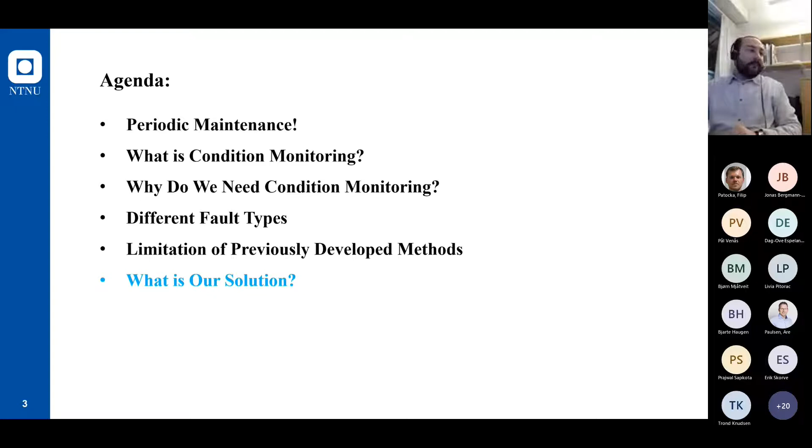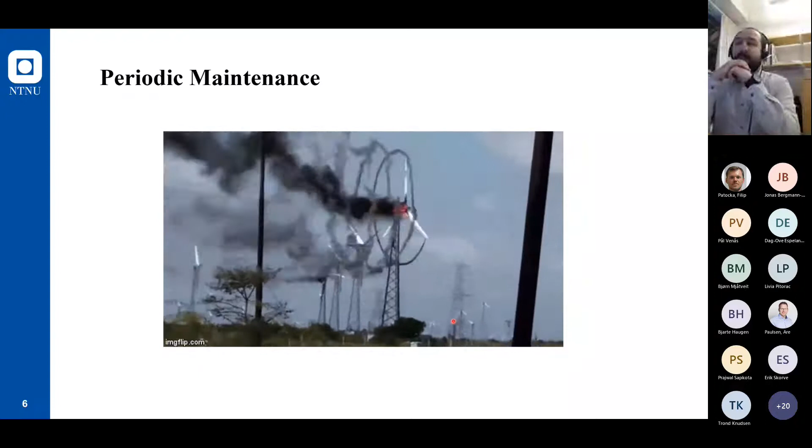As you all know, electrical machines are working based on Maxwell equations, but they are not smart enough, intelligent enough to tell us when they will fail, or when is their periodic maintenance time. So if there is any type of failure in an electric machine, they will not give us a notice before, they will fail.

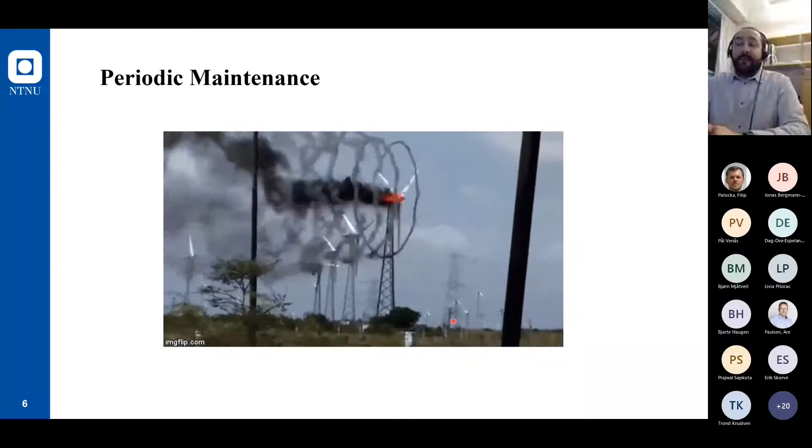What is the role of periodic maintenance? Engineers, technicians, based on the industry timeline, for instance every 6 months or once a year, inspect the electric machine, generator, motor, and if they can find any sign of fault in an electric machine, they will stop it and perform the maintenance. But if they are not lucky to inspect the machine before the failure, then it will fail.

But what is condition monitoring? What we are doing, we are similar to medics. The only difference between us and the medics is our case study. Our case study is the electrical machine. We also have the checklist.

We need to record some signals from the machine, and we need to analyze these signals. And then based on our analysis, we can conclude the machine is operating in a healthy case or it has a fault. And if it has a fault, which kind of fault it has, where its location is, and what its severity is.

But why do we need condition monitoring? Why can we not use periodic maintenance, which is the most dominant approach in the maintenance industry? First of all, we want to reduce the cost. According to a report in the United States, they spend $2 billion per year for maintenance of electrical machines. And they spend 70% of this money only for electrical machines that do not have a condition monitoring system.

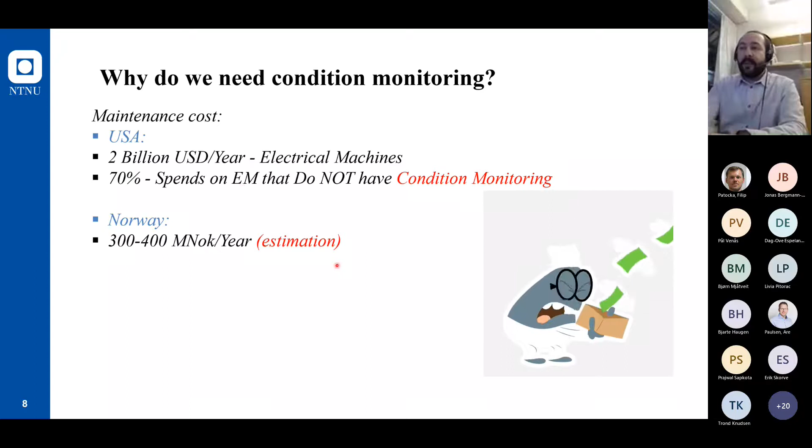We estimated that this amount of money for Norway is around 300 up to 400 million NOK per year. So by using condition-based maintenance, we want to reduce this cost.

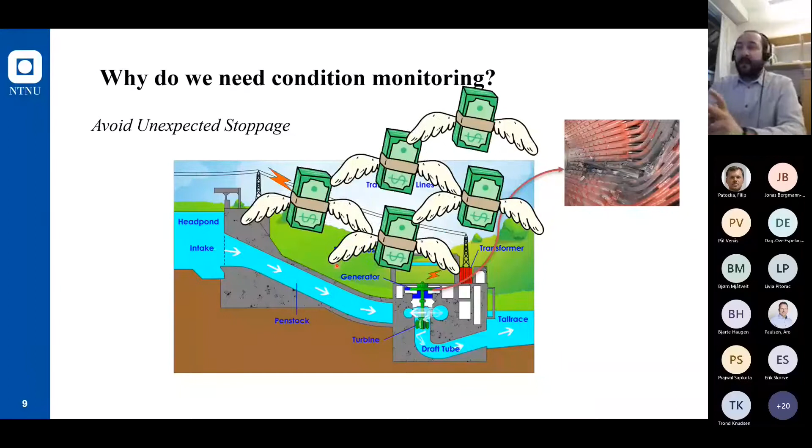The second reason is we want to avoid unexpected stoppage of the machine. Imagine that you are producing electricity and it is in a high season. If there is any type of fault in the electric machine, as I said, it will not give you a notice. It will stop and you cannot produce electricity. And it means that you are losing money. And it is the case for many different application areas, like wind farms, oil and gas platforms, and so forth.

The third reason is we want to reduce the maintenance time. If you are using condition-based maintenance, and if you know which kind of fault you have and where its location is, then during the maintenance period, you don't need to inspect every single part of the machine. You will only need to check the specific part and repair it, and that's it. So by having condition-based maintenance, you can reduce the cost again.

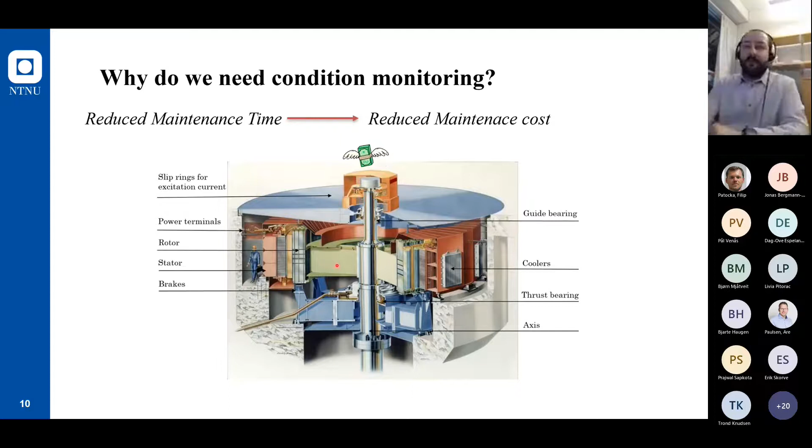Some application areas are located in remote areas, like oil and gas platforms or wind parks. Wind parks are located in a place with a harsh environment. So it is very dangerous for the electricians or engineers to inspect the electric generator, to go up into the mill and check the generator in these wind parks. So we need a condition monitoring system to tell us in advance that your machine will fail, and then they can take action to stop the machine and perform the inspection.

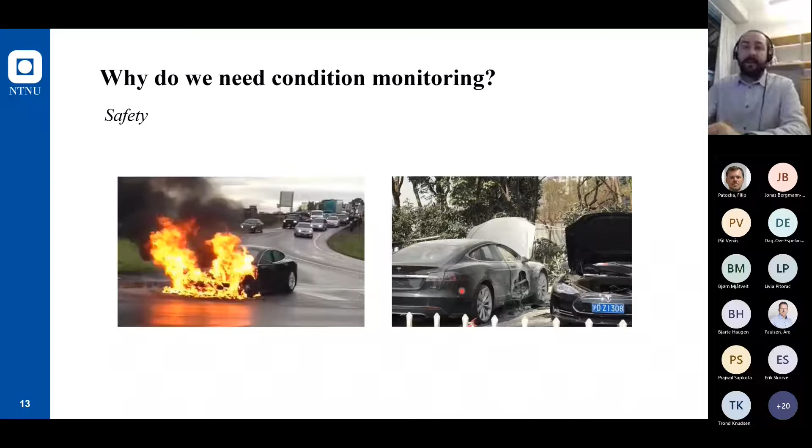In some application areas which are related to human beings, like electric aviation, electric cars, hyperloop, electric ships or ferries, safety is a key point that forces us to use condition monitoring. Since 2010 until now, there are several reports that due to failure in the electric powertrain in electric cars, especially in Tesla cars, there are severe accidents. So safety is key. So we need to utilize condition-based maintenance to avoid any kind of accident.

And imagine in electric aviation, safety is really crucial. So we cannot really trust periodic maintenance for this kind of application.

Now let's move into the next part, which is the different types of faults in electrical machines. We have different types of electrical machines: induction motors, permanent magnet machines with different types of topology, outer rotor, inner rotor, or we have the salient pole synchronous machine. We have other types of electrical machines. But the point is, the faults are common among all these electrical machines.

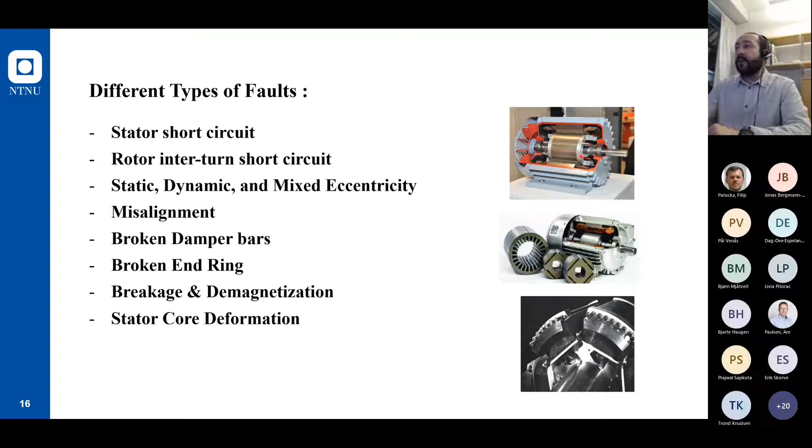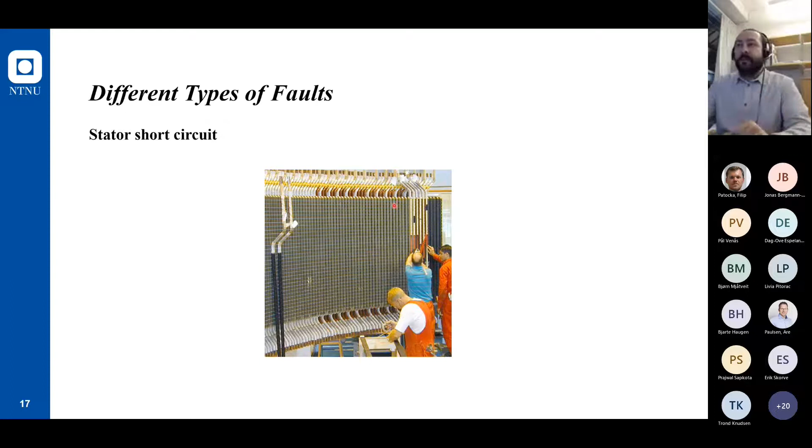Okay, let's see what the consequence of having a fault in an electric machine is. By having a short circuit fault in the stator, which consists of the stator winding and stator core... The most prevalent type of fault in the stator part is the short circuit fault in the stator winding. By having a short circuit fault in the stator winding, which can be due to different reasons, in the best case you need to repair only the stator winding, but most of the time it can damage the stator core. So it means that if you have a fault, you need to replace both the stator core and the stator winding.

The rotor in a salient pole synchronous machine has multiple turns on each pole, and we could have a short circuit in the rotor field winding. But since the voltage level in this type of winding is low, even with a few shorted turns, the machine can operate for a few months or maybe a year.

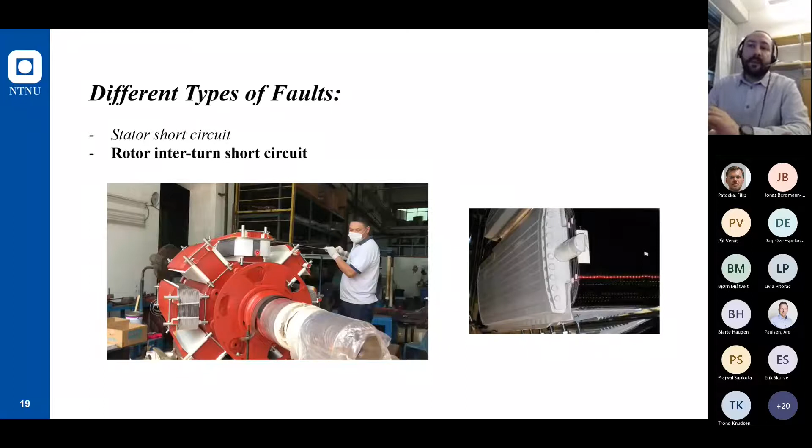The next type of fault is eccentricity faults. We assume that for a healthy electric machine, the rotor must rotate exactly at the center of the stator. So the air gap is identical at any point. By having a static eccentricity fault, on one side we have a smaller air gap, and on the other side we have a larger air gap. But this is constant, so the smaller air gap is always close to one side of the stator.

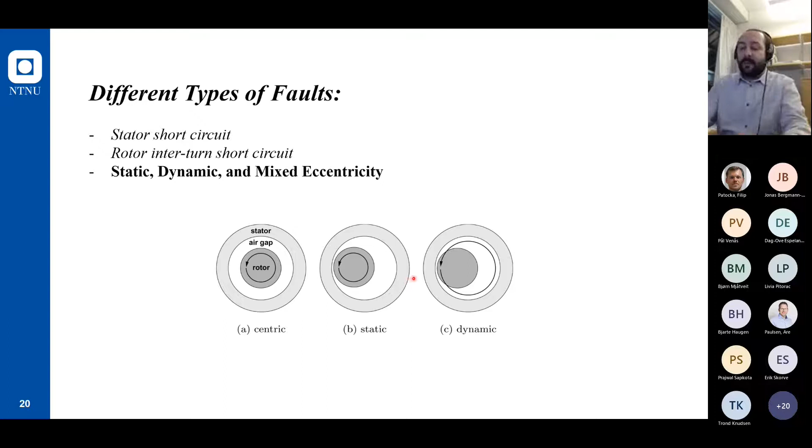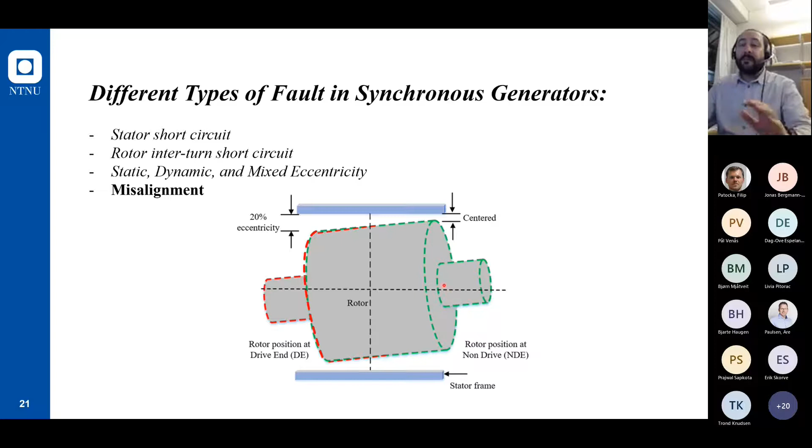But in the case of dynamic eccentricity, this small air gap will start to rotate inside the stator. The worst case of eccentricity fault is misalignment, since in the case of misalignment, the air gap length varies along the axial axis of the machine. Detection of this fault is really difficult. Okay, if you have eccentricity or misalignment, what will happen to the machine? In the worst case, the rotor can touch the stator core. And as you see, it can damage the stator core, stator winding, rotor core, and rotor winding. What does it mean? You need to replace the entire machine.

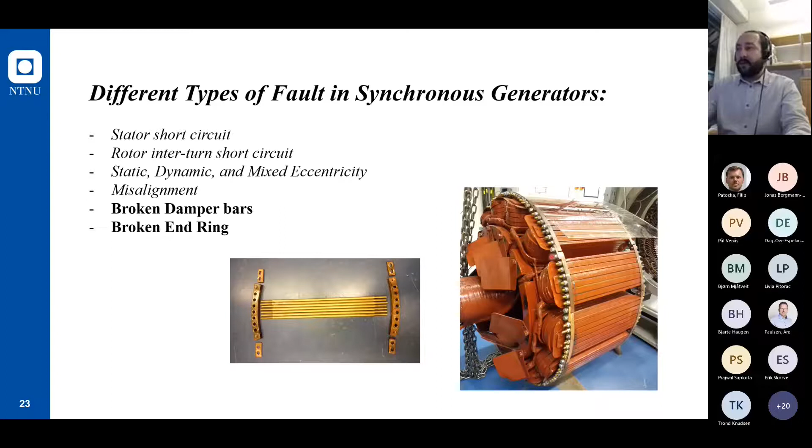The next type of fault is the broken damper bar or broken end ring fault. This type of fault is mostly prevalent in induction motors or salient pole synchronous machines. What you see here, these are the damper bars, this is the end ring, and these are the connecting points to the end ring. In the case of a broken damper bar fault in induction motors or salient pole synchronous machines, if you're lucky, you only need to repair the rotor, but in the worst case, it can damage the stator winding.

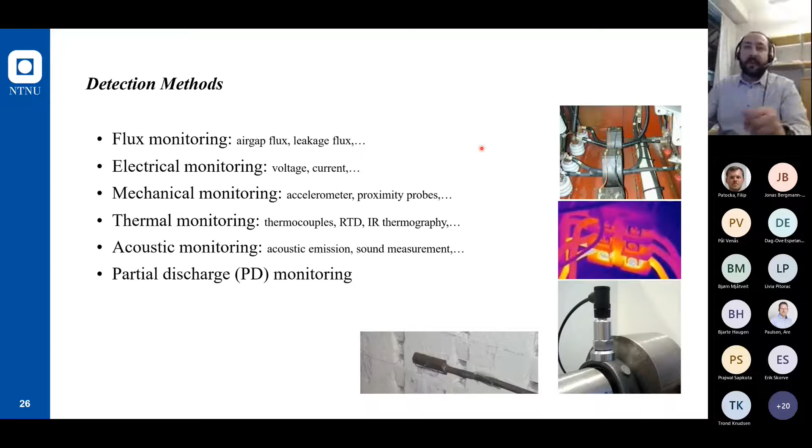So you already know which kinds of faults we have in electric machines. Let's see which methods or approaches we already have for condition monitoring. We have different types of methods because we have different types of signals in an electric machine: magnetic field, voltage or current, vibration, and we can use thermal monitoring. These are all commercialized methods that you can utilize for condition monitoring. But these methods have some limitations. Let's see what the limitations of these methods are.

We can categorize condition monitoring methods into two: one is online and the other is offline methods. In the case of the offline method, you need to stop the machine.

Sometimes you need to remove the rotor, like in the case of core fault detection, and then perform the inspection. Or sometimes you need to measure the resistivity or inductance of the phases, and based on that, maybe you can detect the fault. But these methods are not favorite of industry because you need to stop the machine. They cannot produce, they cannot operate the machine in their production lines.

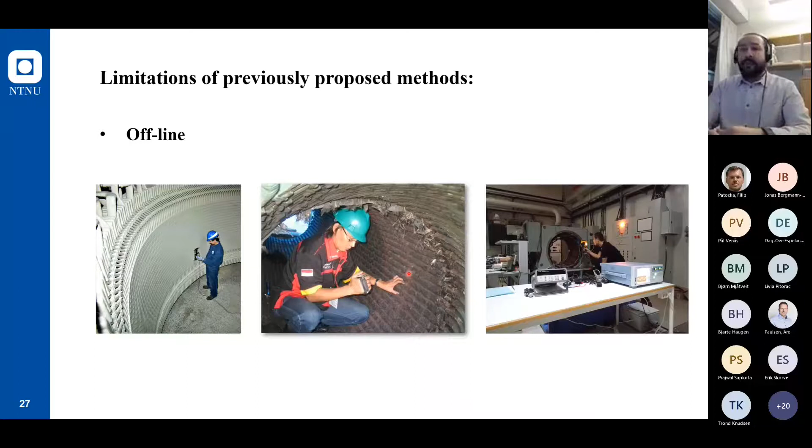Also, this signal, the air gap magnetic field, can provide a very detailed informative signal to us, but its main problem is it is invasive. So especially for large electrical machines in the hydropower plants or in wind parks or in oil platforms, it is very difficult to convince the industry owner to remove their rotor and stop the production. The other point is these sensors are very fragile. Even if you can install the sensor inside the machine, after a couple of months, it will start to fail. So you need to replace it.

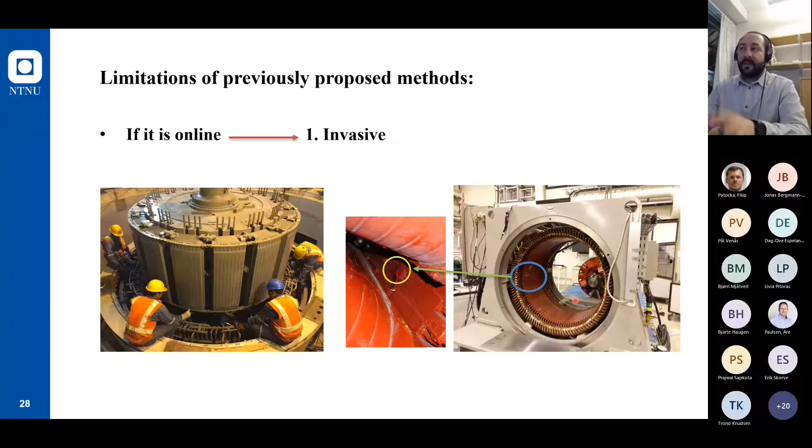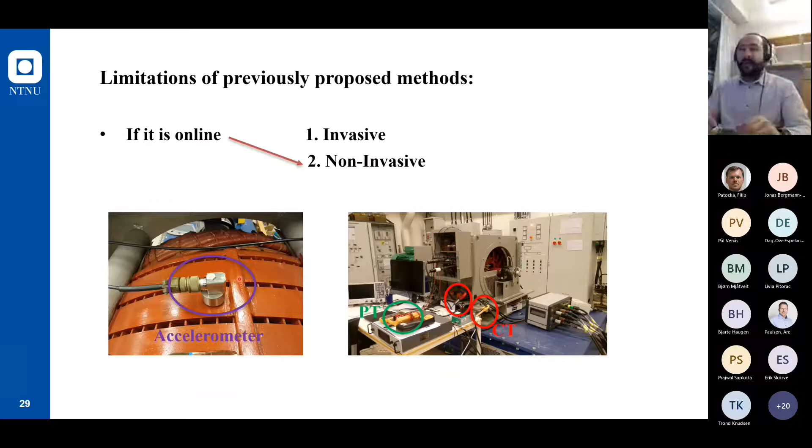So researchers came up with the idea of utilizing non-invasive methods. It can be measuring the voltage or current of the machine utilizing PT or CT, or you can use an accelerometer to record the vibration. These methods are non-invasive, but the main problem with these methods is they are not sensitive to the faults. It means that you need to have a certain degree of fault in a machine, like 30%, 40% eccentricity, or a couple of short circuits, then you will see some variation in these signals. Otherwise, for earlier stage detection, which is crucial for some applications like electric aviation, electric cars, you cannot trust these methods.

The third limitation of previously developed methods, they are expensive. Let's assume that the data acquisition system and the analyzing methods are the same. And let's only consider the comparison between the sensor cost. If you're going to use air gap magnetic field, you need to use Hall effect sensors. And for a comprehensive condition monitoring, you need at least 8 sensors. Each sensor can cost 10,000 NOK, so you need 80,000 NOK only for Hall effect sensors. In the case of using voltage or current, you need 3 sensors, and for the lowest price, it is 10,000 NOK, so it will cost 30,000 for each of them.

And then for accelerometers, even if you want to use 3, because most of the time we need more than 3, but for the lowest case, we need 3. Each of them will cost 15,000, so 45,000 for 3 of them. For a good thermal camera, the lowest price starts from 100,000 NOK. For a partial discharge measurement, this one is the worst case. It costs 500,000 NOK, and you have to install it permanently on the machine for online monitoring. And in the case of offline monitoring, you need to perform the test in offline mode.

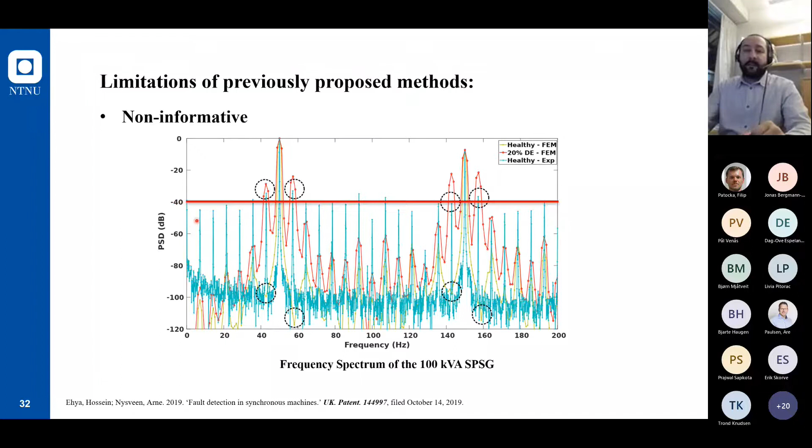Maybe you want to say, let's define a threshold, but these thresholds depend on the power rating of the machine and its topology. So maybe for a 100 kilovolt-amp machine it is minus 40 decibel, but for a 100 megavolt-amp machine maybe it is minus 30 or minus 50. Okay, what is the solution for that?

We proposed a method. Our method is online, so you can install the sensor even during the operation of the machine. You don't need to stop the machine. It is an informative signal processing method. It means that it will give you detailed information about which kind of fault you have, its location, and its severity.

It is sensitive, so it's not like vibration or current and voltage measurement; we can detect one interturn short circuit fault or 5% eccentricity. The last one, which is the most important for industry players, it is inexpensive. I will explain in detail. What is it? What is the idea?

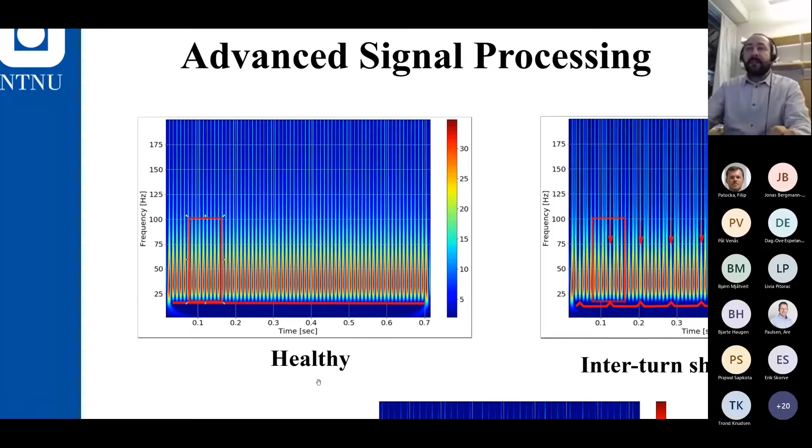For instance, this representation is for an 8-pole machine. So in the case of healthy operation of the machine, you have 8 of these stocks, which represent one mechanical revolution or the entire rotor poles. As you see, for a healthy case, we have a uniform pattern. The intensity is the same. By introducing an interturn short circuit fault in the rotor field winding, the faulty pole's amplitude and also its shape is completely different.

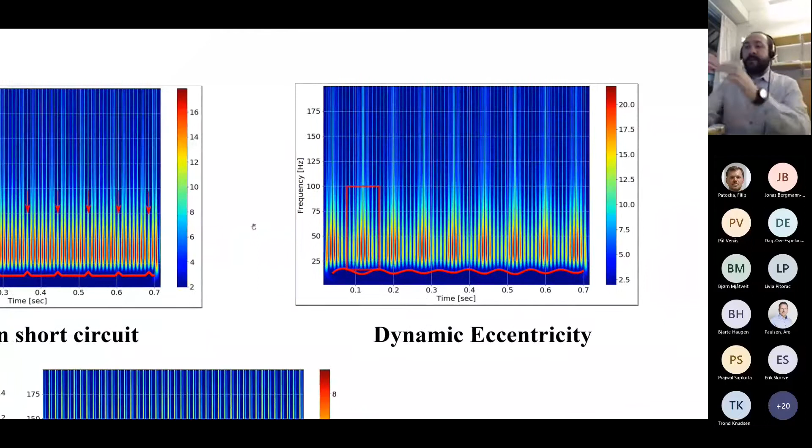By introducing or emulating the dynamic eccentricity fault, we have a completely unique pattern. What about static eccentricity fault? Static eccentricity, you cannot detect this fault using vibration, voltage, and current. So it is impossible to detect by utilizing those methods. But in our case, we only need 2 sensors on 2 sides of the machine.

On the one side where we have a larger air gap, the amplitude will decrease. And on the other side, where we have a smaller air gap, the amplitude will increase. So in this case, we can even detect a static eccentricity fault. What about broken damper bar fault? This one is very tricky, especially in synchronous machines. Utilizing these methods, we can detect the fault both during transient operation and during steady-state operation of the machine.

I said our method is inexpensive because the cost of our sensor for mass production is only 100 NOK. So even in the case of utilizing 8 sensors, it will cost 800 NOK, not 80,000.

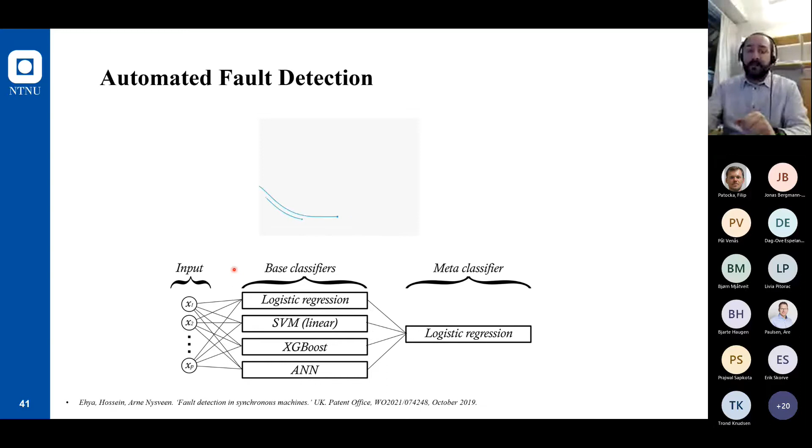and the method will tell you whether the machine is operating in a healthy condition or not, and if it's operating in a faulty condition, which kind of fault you have, where its location is, and how severe it is. So it will give you a very comprehensive report, and that's it.

And regarding our case studies, first, I have applied all these faults to this 100 kilovolt-amp salient pole synchronous machine, which resembles a typical Norwegian hydropower plant generator. You can emulate different types of fault, like short circuit fault. You can remove the damper bars to have a broken end ring or broken damper bar fault.

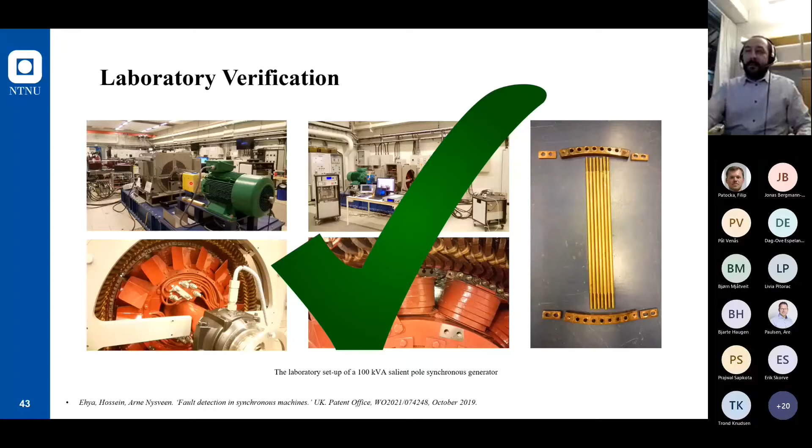You can even move the stator core to the right or left to emulate the static eccentricity fault. And we were able to detect all these faults with very high sensitivity in a lab. The next is, because most of the time you can come up with a very good idea and get really good results in a lab, but when you use it in reality, it doesn't work.

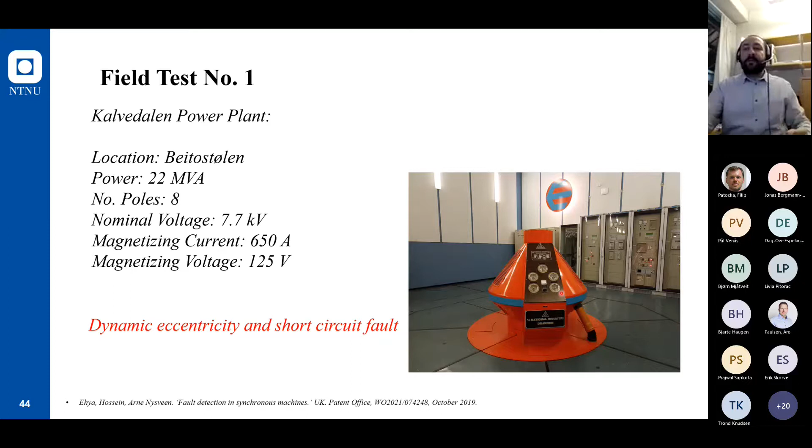So I had a chance to apply my method to a 22 megavolt-amp machine in one of the Norwegian hydropower plants. It has a completely different topology, different power rating, and we were able to detect a fault in this machine. It has two faults, dynamic eccentricity and short circuit fault. So it indicates that our method is even able to detect two faults at the same time in this machine.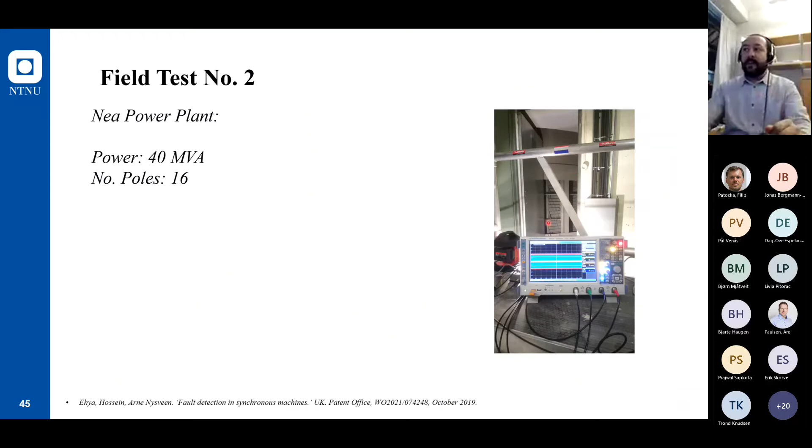The next case study is this generator with 40 megavolt-amp power rating with 16 poles. In this power plant, they have 4 units. So we were able to check how noise and environment impact our signal while the other 3 units were operating. And in this case, we were able to detect the faults, and we realized that the noise and environmental factors do not really influence our measuring signal. So this case study was also successful.

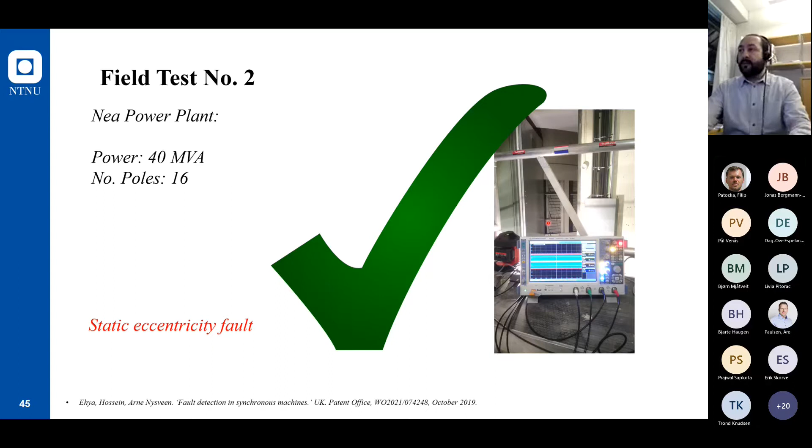If I want to summarize my presentation, for companies working in the maintenance industry, if you want to survive in the future, if you want to still be a role player, you need to switch to condition-based maintenance. Many companies, as I had discussions with them, are looking for a solution to switch to condition-based maintenance. And if you are reluctant to use it, sooner or later, you will not survive. So condition-based maintenance is the only solution for the maintenance industry in the future.

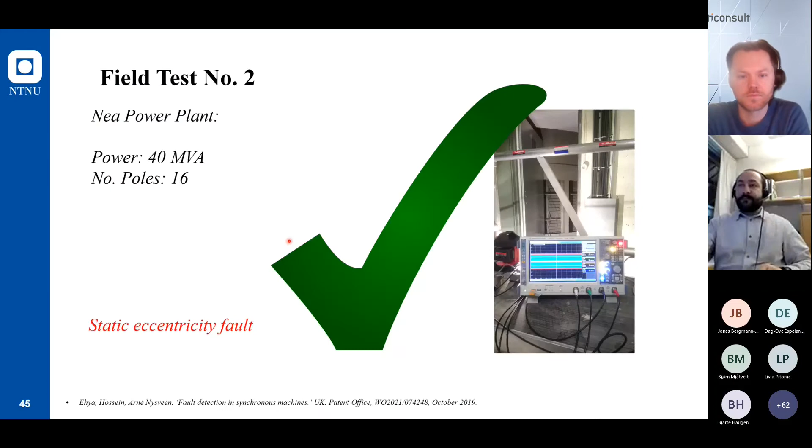One more from Mats. Each machine is unique. Do you take a fingerprint and consider that as normal operation? The good point, or the novelty of our method, is you don't need any information from the machine. So regardless of their power rating, even their specification, you can apply this method. What you need is only the number of poles in a machine, which you can easily find on the nameplate data.

So you don't really need any information from the machine, regardless of their power rating. It can be any type of electric machine, any type of fault in an electric machine. If you have the number of poles, you can perform this test, and it will give you detailed information on whether you have a fault or not.

We have a question from Haugen Bjarte. What are the requirements for the data logger? What we used is an oscilloscope, but the only requirement is you need a data acquisition system that can record the data with a sampling frequency of 10 kilohertz. That's it. So it can be an oscilloscope, or it can be a data acquisition card, whatever you have. So you can integrate this method into your existing system, and you don't even need to invest in a data acquisition system.